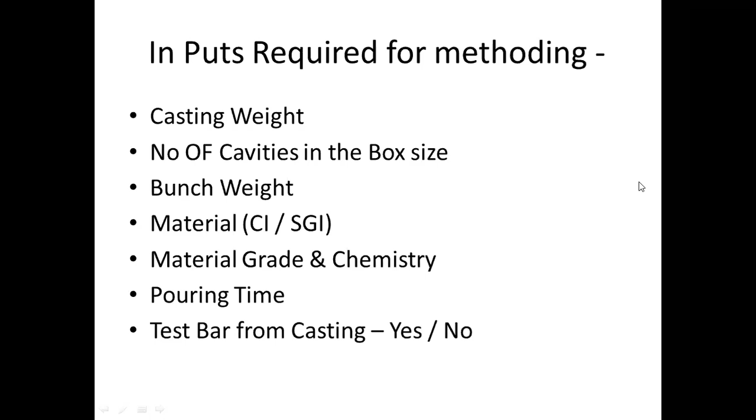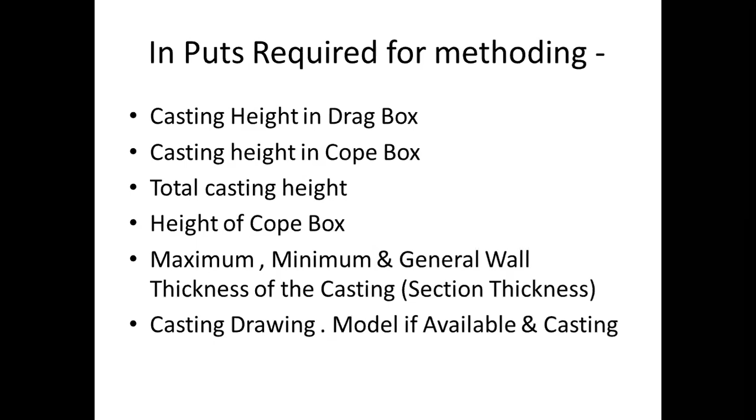Next slide please. These are the basic information required to calculate the pouring time and choke area: casting height in drag box, casting height in cope box, total casting height, height of cope box, maximum, minimum and general wall thickness of casting, section thickness, casting drawing, model if available — that will be more clear to us where the sections have changes. In case of ductile iron and radiography, level has to be considered; some people give clearance for level 1, or some people ask for level 2 also.

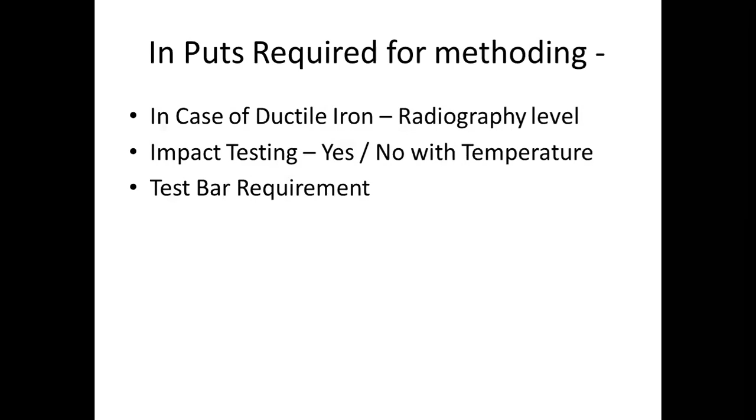So impact testing, yes or no, with temperature — room temperature, minus 20, minus 40 — and test bar requirement. This is just given as a guideline point of view.

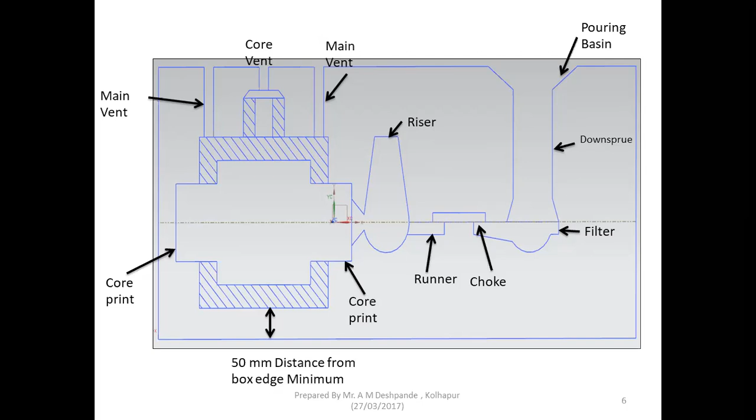Basically, to know casting height in cope box, riser height, and some terminology — choke, runner, filter, core print, main vent. Main vent means mold gases, and core vent means core gases. These are standard terminology.

In case of cast iron, basically ingate thickness will be 5 mm, then notch will be 4 mm, distance from casting will be 3 mm, and distance from runner to casting should be around 30-40, not more than that. That is also equally important.

This sketch is purposely given because of the flow-offs, basically rejections due to sand. While molding, as you can clearly see, I have provided 3R required, diameter of flow-off at top 10 mm, at bottom 12 mm, thickness of pad 2 mm, washer, then M8 or M10 threading. These are minor things but most important, because otherwise if the flow-off is bent, there will be mold breakage, extra sand will be there that has to be grinded, or sand may fall on the casting surface after closing or while clamping the box. That's why this sketch is specifically given. It is common for CI or SGI.

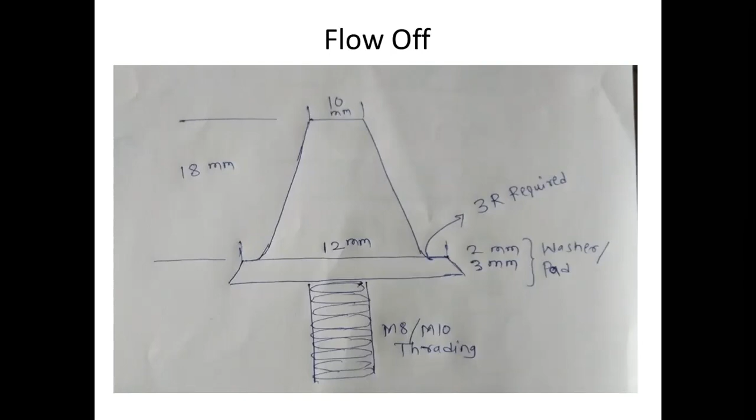While doing a gating system, pouring head is the most important factor. Pouring head should be 3 to 4 inches above the highest point of casting, with 3 inches minimum above the highest point of casting, not above the general level.

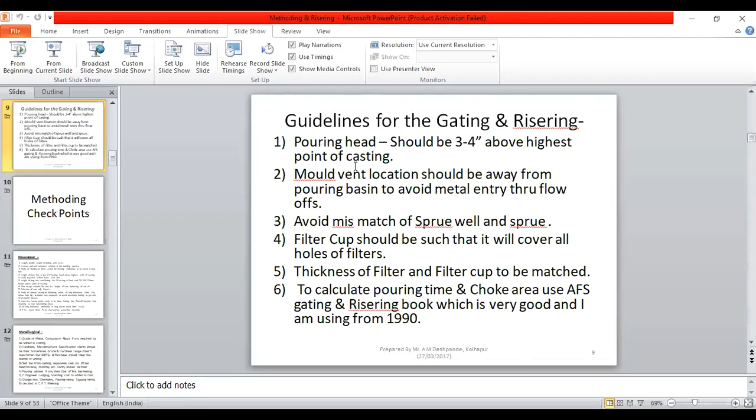Mold vent location should be away from the pouring basin to avoid metal entry through flow-offs. Also avoid mismatch of sprue well and sprue.

Filter cup should be such that it covers all the holes of the filter to get correct filtration and to use maximum area of the filter. That will directly control the pouring time.

Thickness of filter and filter cup should be matched. Normally, if the filter thickness is less, sand will fall through; if it is more, the slag will flow away. So thickness of filter and filter cup has to be matched perfectly.

It should be within 0.5 mm. If ceramic filters are used, the thickness varies up to 0.5 or sometimes 1 mm. So we have to instruct the ceramic filter supplier to take care of that, and this point has to be added while accepting the filters.

To calculate the pouring time and choke area, use AFS gating and risering. That is our workshop today, so I'm going to show exact pouring time and choke area calculations, with 2-3 case studies.

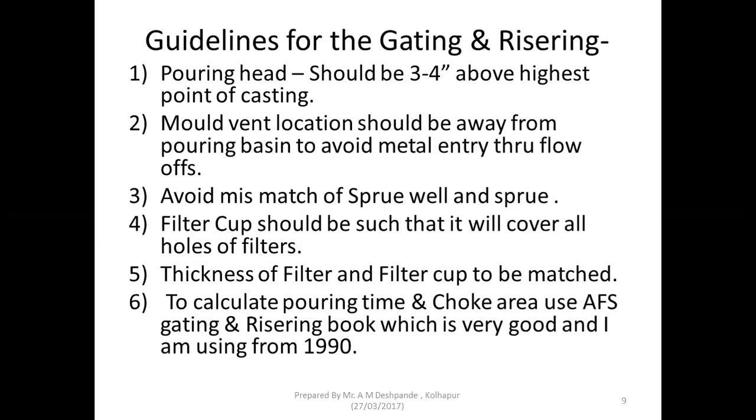These are the methoding considerations while designing the pattern, core boxes, or APQP - advanced product quality planning: length, width, height including print sizes, general wall thickness, and tolerance suitable to the molding practice.

This is most important. If tolerance is plus minus 0.5 mm and machining allowance is 2 mm, we have to go for shell molding. If machining allowance is 2.5 mm, then high pressure molding line. If machining allowance is 3 to 3.5 mm and accepted, it's better to go for ARPA.

Then study of chunky or thick section for feeding, preferably to be taken in the drag box.

Height of cope box - as already told, to get a 3 or 4 inch pouring head above the highest point of casting to avoid rejection due to blowholes and cold shut.

Height of drag box, considering weight of casting, should have 70 sand core below the bottommost point of casting. It should be 70 or 100 as per the weight of casting. If weight of casting is around 100 or 150, in case of ARPA 1300, we keep sand core at least 100 or 150 mm below the lowest point of casting.

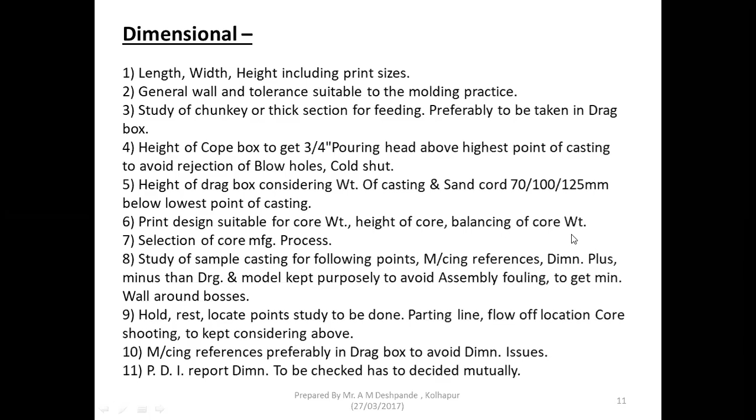These are the metallurgical point of view: grade of metal, compulsory alloys if any required to be added in casting. Because some people specifically mention that we want the carbon about 3.3, we want copper, we want moly, depending upon the criticality of the casting. They specially mention that has to be taken care of while costing. Hardness, microstructure, specification clarity should be there.

If grade and hardness range doesn't match, then our marketing and purchase should clear that matter in writing. Sometimes hardness is mentioned at different places, or casting having 10 mm, 20 mm, 15 mm wall, and at that time, if they ask, in case of CI, wall thickness is 15 mm, if they ask type A should be 90%, then in that case it will not be possible. So we have to study properly drawing, hardness, micro.

These are to be clearly clarified before doing a pattern. Test bar from casting separately, number of heat invoice monthly, that clarity should be there. Test bar of once in a month has to be given, or each lot has to be given. That has to be clear.

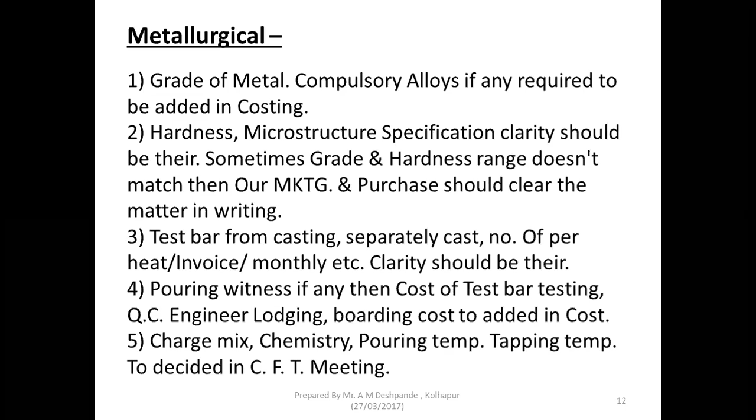Design of gating system, pressurized or non-pressurized, considering similar job history on our foundry. Normally 3 or 4 similar jobs we are doing, so case history, back history has to be taken care of. Then again, in the development, same mistakes should not be there, so that case history has to be taken into account.

Choke area, pouring time, that already told. Number of ingates - that is our today's workshop only, basically. Mold vent size suitable for the geometry of casting, pad to be given, flow off is must. Area of vent should be double the choke area, or sometimes 2.5 times the choke area for heavily cored casting, blocks, heads or housing, clutch housing and trumpet housings.

Print clearance in drag and cope should be suitable to type of core setting facility. If we are doing the core setting by hand, then clearance should be more. If we are going to do core setting using a core assembly transfer fixture, then you may reduce the clearance. Chaplet pads to be kept integral to pattern and core box - this is most important. Design of core checking and core setting is to be prepared at the start only, considering the geometry.

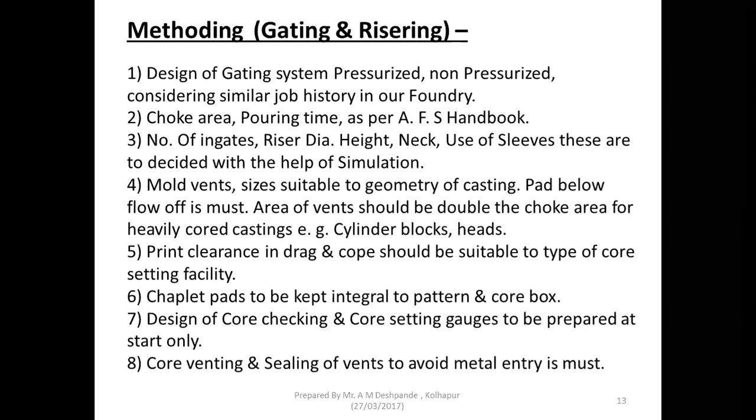Machining reference points grinding to be avoided, but there should be clean and no extra metal allowed. Work instruction with photograph showing these points to be handed over at start only. Sand on inner outer face not allowed. Important dimension checking should be included across parting line considering tolerance. Core out mismatch, general wall and dimension specified by customer. Paint type, make, viscosity, scratch test, drying facility, stacking, handling, etc.

That to be studied. Dispatch document, reports, etc., to be decided with marketing department.

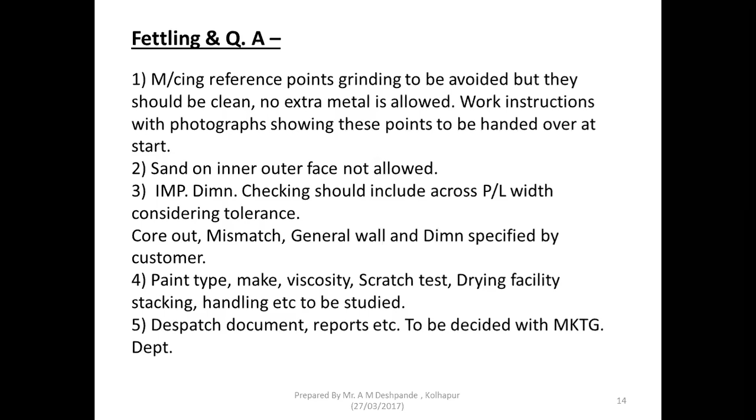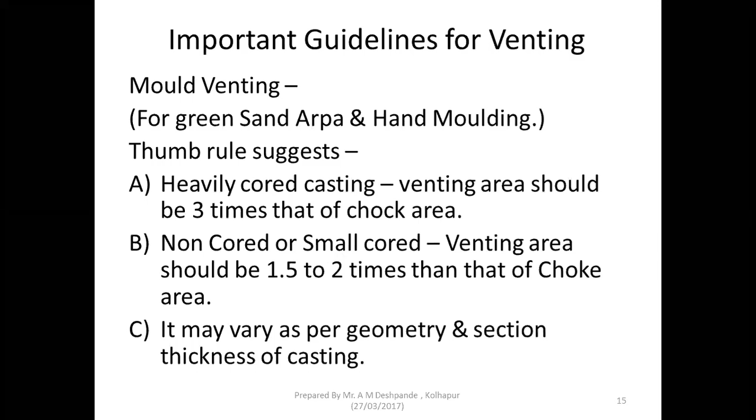Mold venting for green sand and ARPA, heavy casting - that is already covered. You may go to next slide.

Now we'll come to the basic, our topic, pressurized or non-pressurized. If we are considering pressurized gating system, then first is the downsprue, area of downsprue, second is runner and choke. So ratio: downsprue 1, runner 1.2, and choke area 0.8. So where the choke has to be kept, that is most important. As per geometry, box height, we have to decide exactly where the choke has to be given.

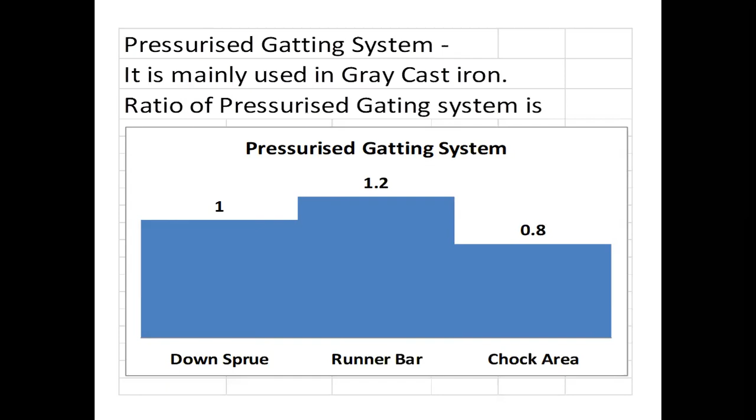You are going to calculate the choke area - first choke area, then runner area, then downsprue area. That can be calculated. As an example, diameter of downsprue if it is 30 mm, the area will be 706.86, runner area 1.2, and in-gate area or choke area - these are given: 1.2, 0.8.

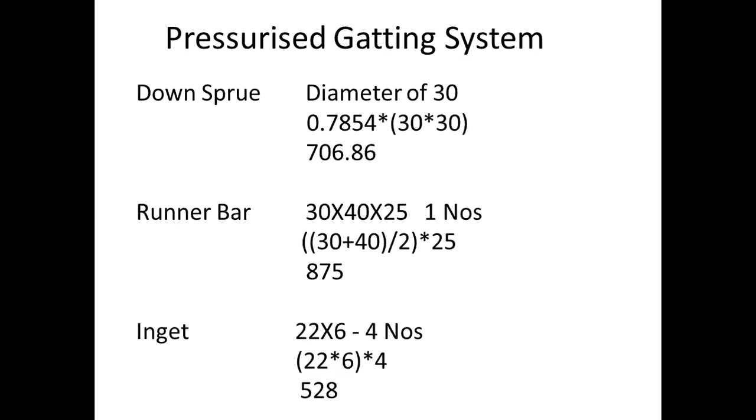If it is non-pressurized, normally non-pressurized gating is done in ductile iron. In case of cast iron, nowadays we are not doing this much. Preferably for automobile casting, pressurized gating is advisable. For non-pressurized gating, down sprue, runner and choke area have a ratio of 1.2, 1.4. Calculations are given.

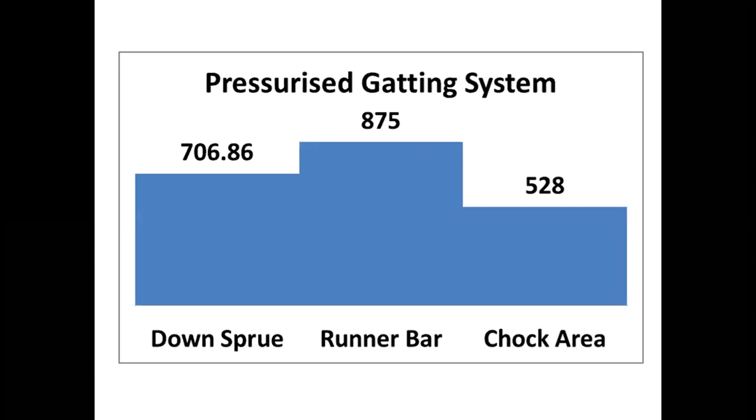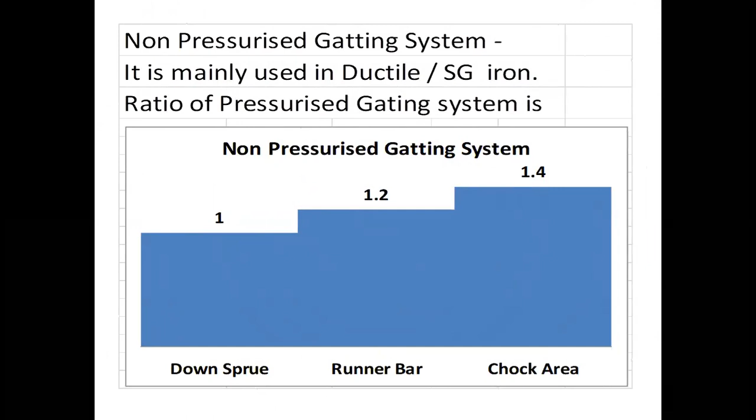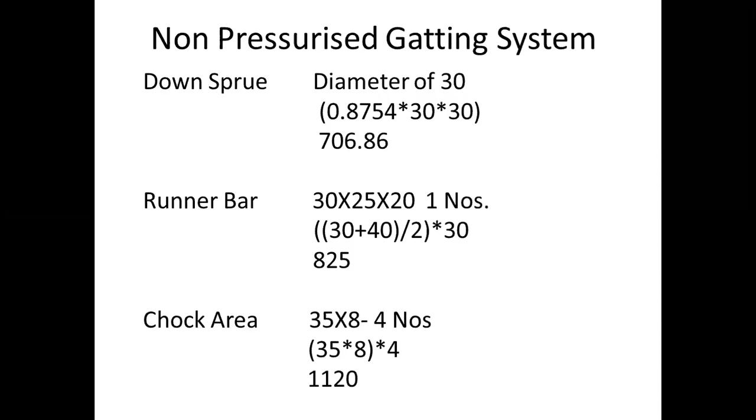Sample calculation. Ratios are given. Next, as per runner, down sprue and choke area - in this case it is a choke. In-gate is considered as a choke.

This is non-pressurized. 706, 825, 1.2, 1.4. There is no separate choke, but all the in-gates which are there, those are kept as the choke area or in-gate area, you can say.

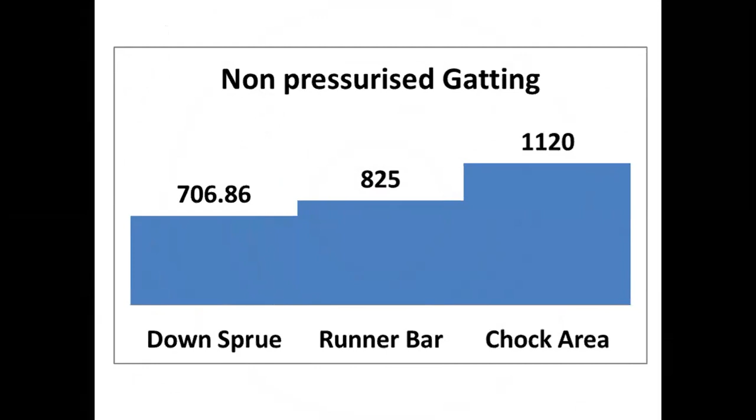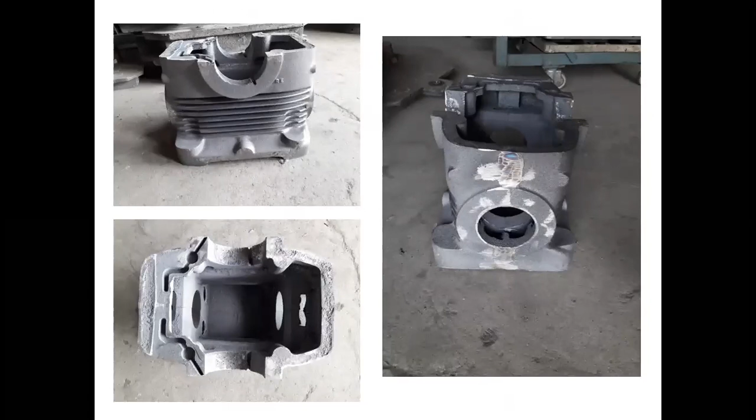This is the casting. In the next slide, the defect photograph is there. All the sides have been shown, because fins are also there.

That's why minimum temperature 1380 is selected. General wall is more, but the fins are there. Fins are most important. It is the reduction gearbox housing casting.

Now you can see the blowhole at the highest point of casting. Around 40% rejection was there. These are the blowhole defects, clear cut.

First, we will calculate the pouring time. Pouring time is first, then height of cope box. All the things are given, choke area, and we'll show the calculation. The formula has to be given, or I am unable to see the slide. This slide is important, basically, while calculating the pouring time.

We are checking the fluidity of metal. Fluidity of cast iron depends on the carbon equivalent and pouring temperature.

Next please. So these calculations are given. Choke area, T is equal to WDCA square root. W is the weight, D is the, these are standard things which are given, density of molten metal, then 0.22. A is the choke area.

The answer will be, first will be 0.395 square inches. If you convert into square millimeters, that will be 255. Mind well, in cast iron, if you have the pouring temperature 1380 or 1400 max, for 60 kg or 80 kg casting, choke area will be around 300 to 400 mm square as per each, as a thumb rule we can say. But this calculation of choke area is most important.

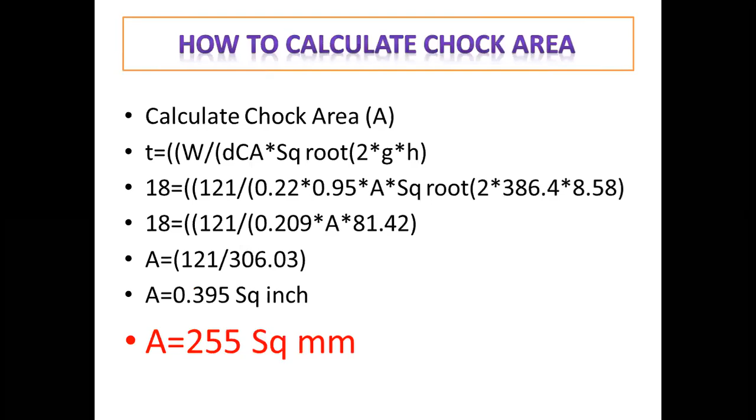This is case study 2. This is an interesting case study. This is cylinder head compressor. Cylinder head, weight is just 1.2 kg. Length, width, height: length 70 mm, width 50 mm, height 20 mm. Grade of metal FG 200.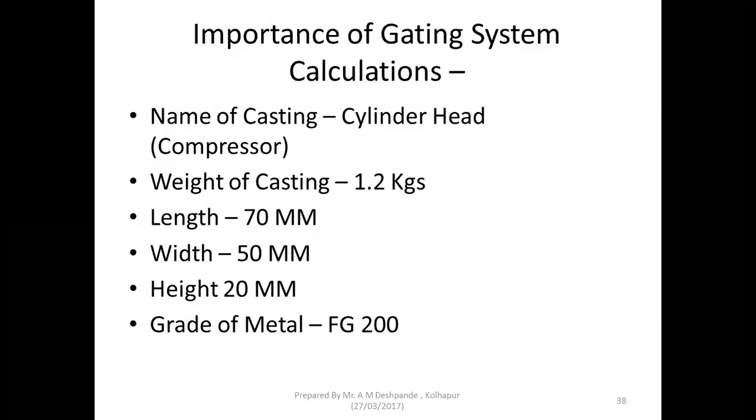Cold shut line was noticed for cope half only, because all the patterns were having the numbers 1, 2, 3, 4 up to 24. During the study, it was noticed that casting in drag box, all were okay. The casting in cope box only having the cold shut line. This was due to improper ratio of gating system. Due to non-pressurized gating system, metal velocity was insufficient to flow against the gravity, resulting in the cold shut rejection.

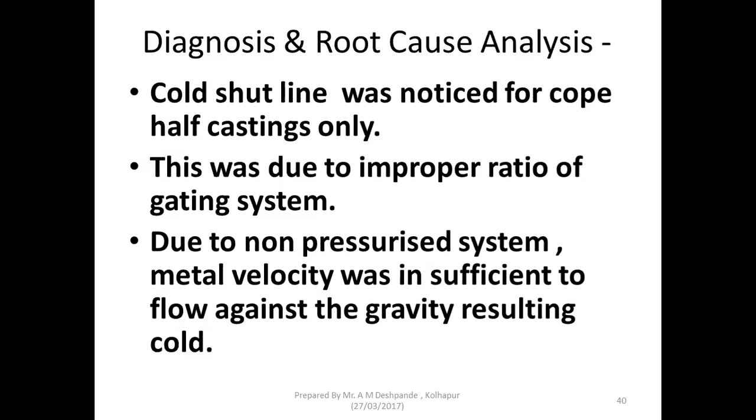Next please. Pressure on ingate is achieved by keeping runner area 1.2 times than ingate area. Four runner bars were fed separately to achieve uniform distribution of metal flow. Runner bar made taper. Pouring time reduced by 2 seconds. Previously it was 10 to 12 seconds, now after modification, it comes to 8 to 10 seconds.

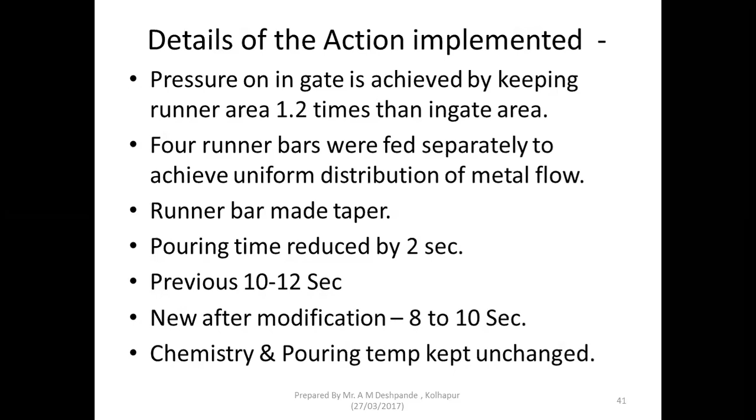Chemistry and pouring temperature kept unchanged, that was not necessary. Next slide. Reason of rejection: percentage rejection 15% total, rejection due to cold 9%. After gating modification, rejection 6% total, rejection due to cold 0.5%.

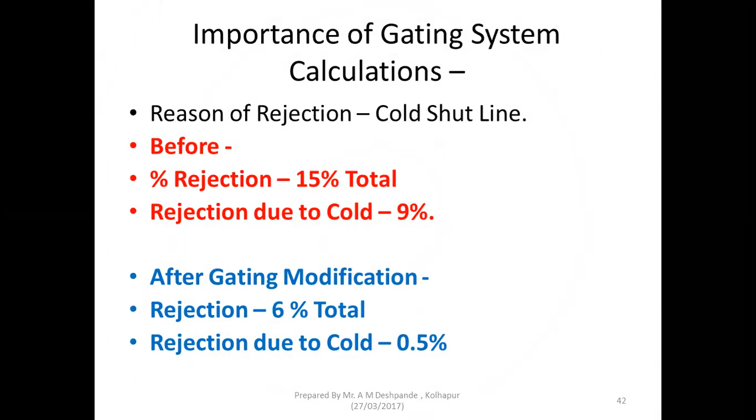So I request to see these parameters, before and after. Downsprue diameter 30 mm, 30 mm, I am not changing. Runner area of 3 castings, before it was 240 millimeter square, but after I made it to 540.

That was the runner bar. Ingate area for 3 casting was initially 600 mm square. Then I corrected it to 450 mm because the weight of casting is just 1.2 kg, so it doesn't require more area. In case of 4 casting, it is 600 mm square.

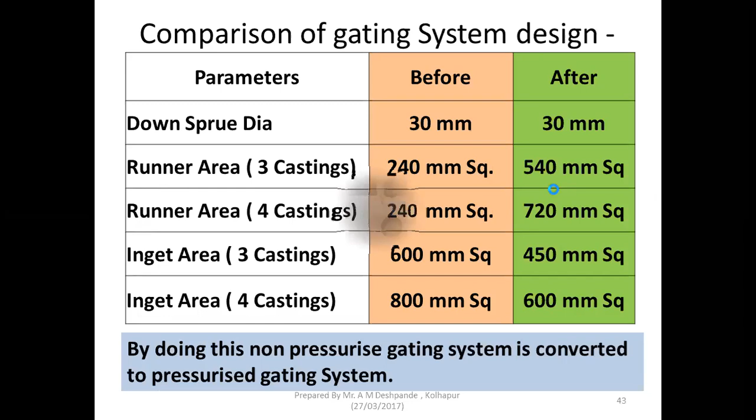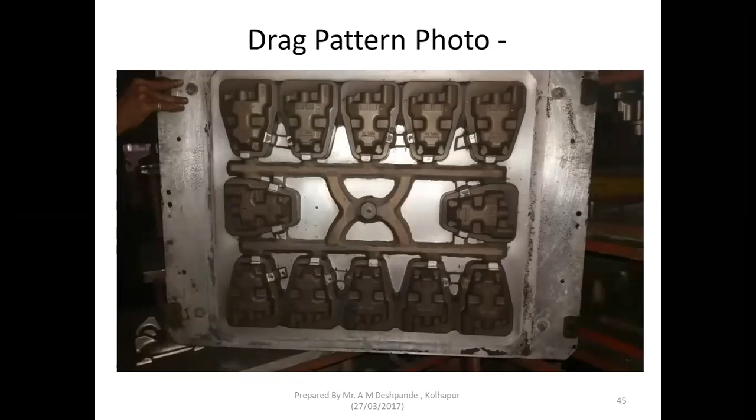These 4 runner bars will be fed separately, so that pressure on ingate will be there, and defect is gone because of the pressure.

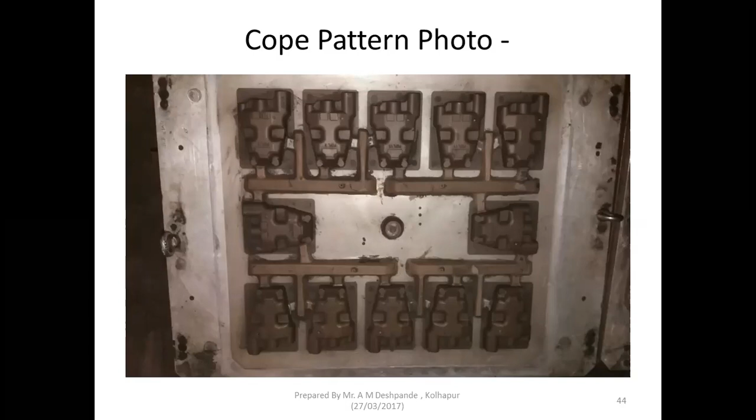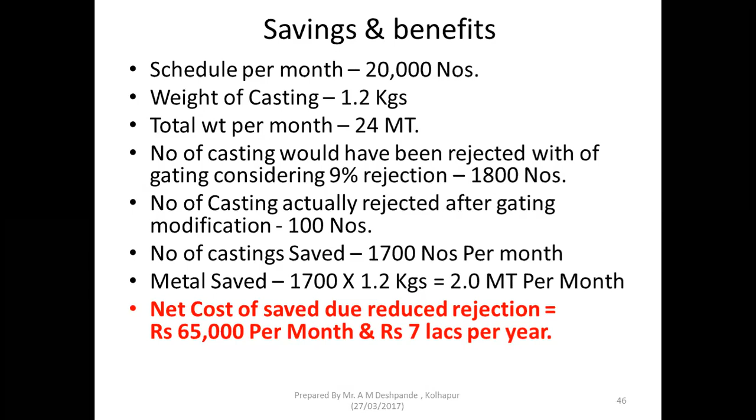This cost is excluding scrap cost that has been deducted. If per kg rate is 60 rupees, 20 rupees has to be taken.

This was the case given to us. It will be presented with the help of simulation tomorrow. We have done the calculation, but we'll show it tomorrow.

I think we have completed from our side. Anybody want to ask a question? You can unmute yourself and ask. One by one, if you have any query or question about this presentation or calculation, you can ask. Meantime, I will go through the further slides.

1 minute. So this is how our evaluations will be there. There will be 2 projects. Project 1 will be around pressurized, non-pressurized. Calculation of downsprue area will be 5 marks.

Calculation of runner bar will be 5 marks. Calculation of choke area will be 5 marks. And identifying gating type, whether it is pressurized gating or non-pressurized gating, will have 10 marks. So 25 marks for project 1.

Project 2 will be for calculating pouring time, calculating effective pouring height or pouring head, and then calculating choke area. Each will carry around 15 marks, so it will be 45 marks, and 30 marks for the written exam through Google Form, which link I am sending after this session. So this is about 100 marks total evaluation.

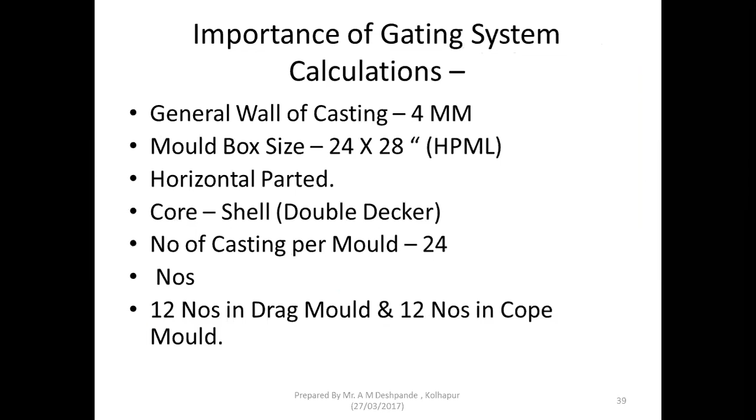Sir, in the earlier slide you explained about the effective pouring height and how to calculate effective pouring height. But pouring head, whatever short form you have used... Yes sir, those are there in this slide I think. So next slide, previous slide, it is there.

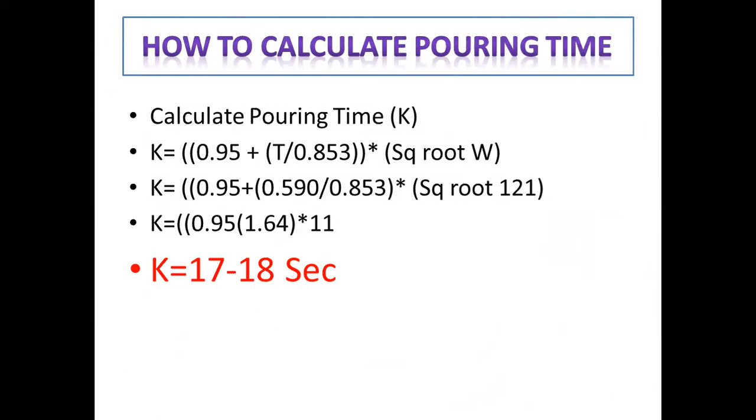In the sketch it is clear, sir. C has been shown, H has been shown, then P has been shown in the figure itself. Top gating, bottom gating, center gating - P is nothing but height in the cope box.

C is the total height in the last one. In the second one, C is the total casting height in cope box. And C is again casting height in a drag box.

H is... and the third down one? Sprue height. Downsprue height and cope box height. Same. Please show next slide.

This is the slide which shows the formula of how to calculate pouring height. This one - effective pouring height.

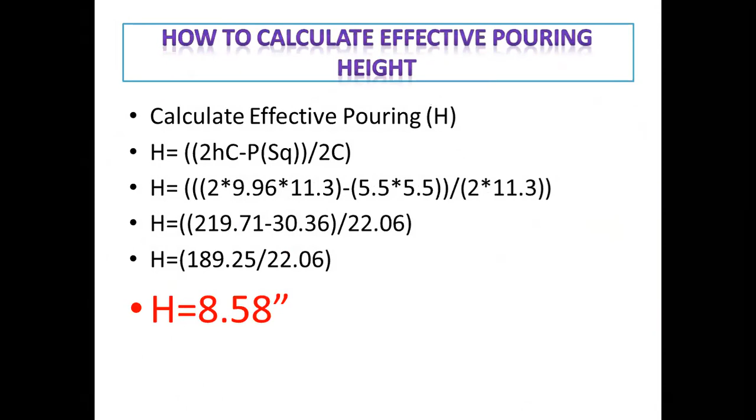In this case, yes sir, what do you want? I want to know what H is representing, what C is representing, what P is representing. That is what I am showing you.

Yes, here you can find all the things. W means bunch weight in LB. K means pouring time in second. T is equal to general wall in inches. H is cope box height in inches. So you can get all the details in this slide, and this slide is given to you in your project also.

This sequence is maintained so that you can get clarity on how to calculate. Only thing you have to do is convert it into inches, and Fahrenheit.

You might have, if you have any problem while calculating the fluidity factor, you can ask. Fluidity factor relates with the carbon equivalent temperature. It is the composition factor also given in there.

X-axis carbon equivalent, Y-axis pouring temperature, and topmost point - these are the numbers you can see at the center: 39, 40, 42. Those are representing the fluidity. I have made a tick mark also showing that fluidity in inches.

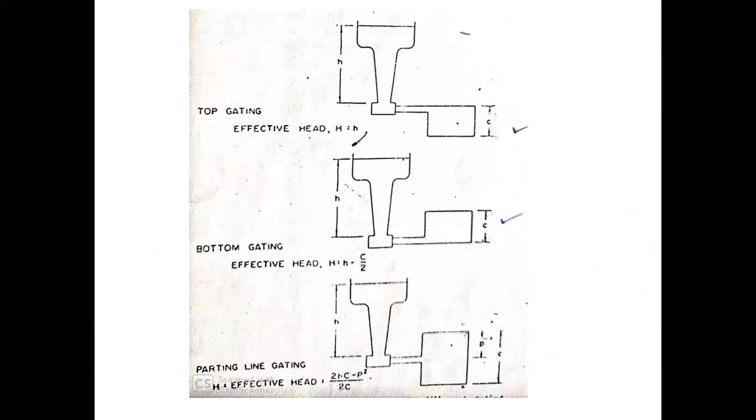Excuse me, can I - yes sir. Now this fluidity, you are calculating from the table that you have given. Typically in a foundry, would you get the same values as given in the table for the carbon equivalent, or do you need to pour a fluidity spiral and check whether you are getting those values.

If you pour the fluidity spiral, that is more better, because while doing melting, we do some process variation. Holding is there, carbon dissolution is not proper. Then if alloy level, chromium is somewhat more, then fluidity will be affected. So at that time it is better to check fluidity using the spiral. We have to standardize the spiral as per that particular job, that particular chemistry. If we standardize, then there will not be any problem.

Sir, now the composition factor given here is without any alloying taken into consideration. Yeah, it is without any alloy - practically we have to, that's why I suggest to pour the fluidity spiral. That is most important. How much is the chromium addition, copper addition, that will affect the fluidity. If phosphorus is 0.1 instead of a different value, then fluidity will have some variation.